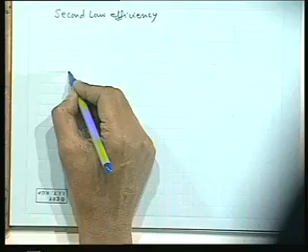Then we start with the second law efficiency. This first part is a repetition, but I must start second law efficiency again. We started with a turbine; hurriedly I will redo it. Let us first recognize a turbine. Now, what is a turbine?

Consider an adiabatic turbine. In all practical cases a turbine is insulated, meaning adiabatic. It is mounted on a shaft, so that we get work at a certain rate per unit mass. In a steady state, as I have told you, everything is done per unit mass.

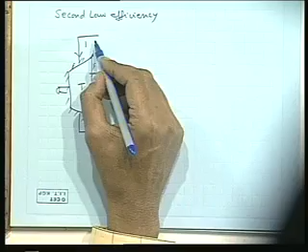So this is section 1, this is section 2, that is the outlet section, that is the inlet stream, that is the outlet stream. So the gas or air, whatever is the working fluid, comes at section 1 with an enthalpy H1 and goes out with an enthalpy H2.

If we neglect the changes in kinetic and potential energies, we know that del W del M, that is the first law or the energy balance for the steady flow open system, is H1 minus H2. That means we get work out of the difference in enthalpy. So, if at the same time we defined AF1 and AF2, what is AF2?

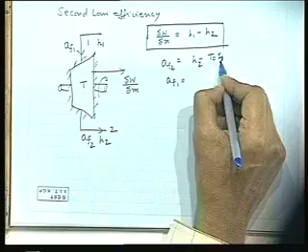By definition it is H minus T0 small s. This is the specific flow availability, so H2 minus T0 S2, and AF1 is H1 minus T0 S1. So, what is then AF2 minus AF1?

If I just write this from their definitions, I'll write AF1 minus AF2 instead, that will be better, does not matter. So, a minus sign will come, that will be equal to H1 minus H2, AF1 minus AF2 equals H1 minus H2 plus T0 S2 minus S1.

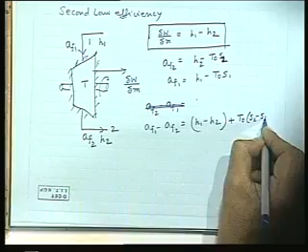So it is clear, you see that decrease in availability is equal to enthalpy change plus this quantity. But the change in enthalpy is what? Del W del M plus T0 S2 minus S1. So what is this? This is T0 delta S universe, because it is adiabatic. So the change in entropy of this working system is the entropy change of the universe.

Now, if the process could have been reversible, this part could have been 0, because the entropy change of the universe is 0 obviously. So in that case, we see it is the difference of availability which could have been the work done per unit mass. Therefore, we see the actual work done, which is the difference between H1 minus H2, is less than the ideal work done, which is equal to AF1 minus AF2, decrease in flow availability.

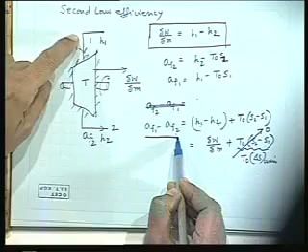So therefore, we could have got more work, which is equal to the difference in flow availability at the inlet and outlet, if the process could have been reversible. And this is gauged by an efficiency known as second law efficiency, which is defined as del W del M.

That is the actual work, divided by AF1 minus AF2, which is nothing but, sometimes we can write this as theoretical work, where this we can write as actual work, and this becomes equal to 1 when the process is reversible. This was clear, we discussed it in an earlier class.

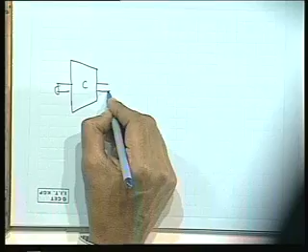Now, similar is the case if you consider a compressor. Now let us consider a compressor. The difference between the turbine and the compressor is that it is an adiabatic compressor. The difference between the turbine and compressor is that it is also a work interacting device, but not a work producing device, it takes work.

Let, on a per unit mass basis, del W del M be the work which is being added to the compressor, and let this be section 1 inlet and section 2 outlet. Similarly, let this be H1 and H2, and corresponding AF1 and AF2. Again, from the steady flow energy equation, you can write H2 minus H1.

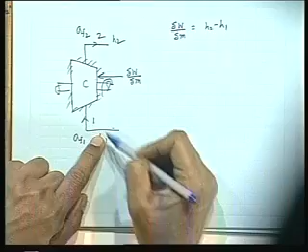Here I am always writing the positive value of del W del M. That means again work is added, so it will be negative. So if you write it, it will become H1 minus H2. I am writing in terms of the positive values. Obviously, when work is added, enthalpy will be more at the outlet than at the inlet, provided we neglect the changes in kinetic and potential energy. So always I write the positive value of the work, and we always recognize beforehand that this is the work taken by the compressor. So if I tell that, there is no harm if I write the positive value, that is true.

Now, here if you see, if you find out the increase in availability, rather AF2 minus AF1, what is AF2? The similar way, H2 minus T0 S2, and what is this? H1 minus T0 S1. So this becomes equal to H2 minus H1 minus T0 times S2 minus S1.

Just the reverse, in a sense. Here you see that H2 minus H1 is the work required by the compressor to go from state 1 to state 2, but the change in availability, the increase in availability, is less than the work required. That means the availability is restricted. If you compare this with your availability balance equation, this is all right.

That means the availability here is the availability here plus the availability taken in by the compressor, that is del W del M minus some amount which is T0 times delta S universe. That means in this case the system, the compressor, demands more work as compared to what it could have taken if the process was reversible. If the process was reversible, that term would have been zero.

That means this I can write: AF2 minus AF1 would have been the work requirement. So therefore we see the actual work requirement is more than the ideal work requirement. In this case, this will go on this side.

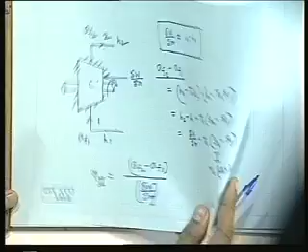Now, if the compressor is not adiabatic, then the Q quantity will come in definitely, and you have to consider whether Q is coming in or going out. I am just giving a simple case where the compressor is adiabatic. In case of a compressor, if you do not consider it adiabatic, then Q may come out.

In case of a turbine, Q may come out, or deliberately Q may be given, so it has to be specified. In that case the energy equations will be modified, and at the same time the availability equations will be modified. So availability balance will be modified; everything is written from that concept.

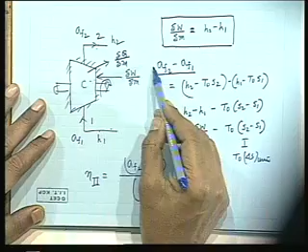So you will see automatically that when there is heat transfer also, the change in availability will correspond to your availability balance equation. But the definition is the same: the ideal work requirement divided by the actual work requirement. That is left as an exercise.

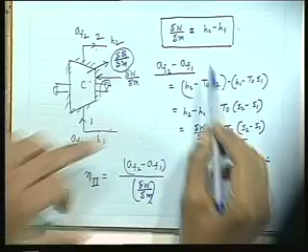You do it: if there is a heat interaction, let us consider some heat is coming out from the system, then what will it be? You change this thing. The definition of availability remains the same, but then H2 minus H1 alone will not account for del W del M; some heat quantity will come in that case.

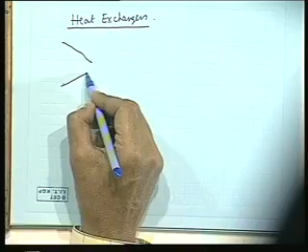Next is heat exchangers, non-work producing devices. Let us consider heat exchangers. There are two types of heat exchangers which we will read afterwards. One is the mixing type. Let us consider it simply, without calling it a heat exchanger, rather a mixing device.

Two fluids are mixed, 1 and 2, and the result goes out at 3. Let the flow rate of the first fluid stream be M1 dot, and the working fluid M2 dot, coming at temperature T1 and T2 with corresponding enthalpy H1. I am interested only in the enthalpy. This is stream 3, with M3 dot and enthalpy H3.

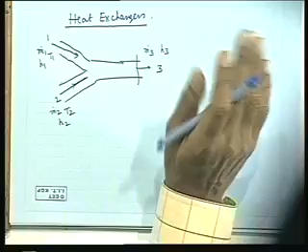Now, how do we define the second law efficiency of this process, or how to analyze it? First, mass balance. There are three things: one is the mass balance, another is the energy balance, another is the availability balance. Availability balance and entropy balance are almost parallel, as we have seen. So if these things can be determined, then one can determine everything.

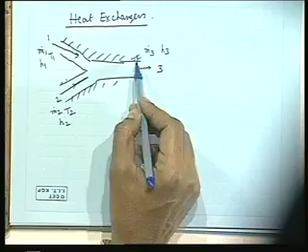Now let us consider the entire system as adiabatic. That means these two streams come in at different enthalpy, they mix and go out, so there is no heat and work transfer from this entire system. That means if we take this as a control volume, the control volume does not have any work and heat interactions. Then the mass balance tells us M3 dot equals M1 dot plus M2 dot.

This is okay. Then what is the energy balance? Energy balance is M1 dot H1, this is the energy coming in, plus...

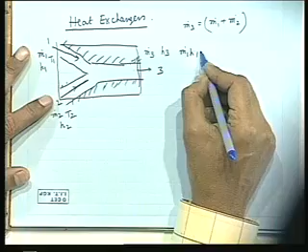Here I neglect the changes in potential and kinetic energy, so the kinetic energy part of the flowing streams I am neglecting. If it is specified that one side's kinetic energy is very high whereas the outlet kinetic energy is very low, or there is a large difference between the two streams, then we will have to take it into account. But if the kinetic energies are almost the same for all the fluids, we can neglect the kinetic energy part.

This energy balance can be written this way also: M1 dot into H1 minus H3. Let us consider M1 as the hot fluid and this as the relatively cold fluid, but it does not matter, is equal to M2 dot into H3 minus H2. I can write it this way also. That means the energy released by one will be the energy gained by the other. This is clear from this type of expression.

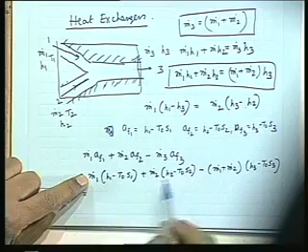So if you now write M1 H1 plus M2 H2, and M1 dot plus M2 dot times H3, they cancel each other. So I am left with minus T0, let us take T0 as constant, minus M1 dot S1, this is minus. So this is minus M2 dot S2, plus M1 dot plus M2 dot S3.

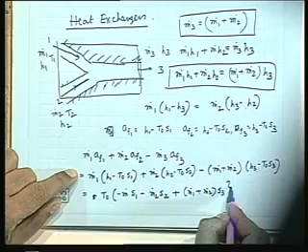What is this? This becomes T0 times M1 dot into S3 minus S1, plus M2 dot into S3 minus S2. What is this quantity? This quantity is delta S universe. So that means T0 into this is the irreversibility rate.

That means if I make an availability balance, availability in is equal to M3 AF3 plus I dot, or the other way: M3 AF3, the availability out, is the availability in terms of rate minus the destruction. Clear? So that is the availability balance.

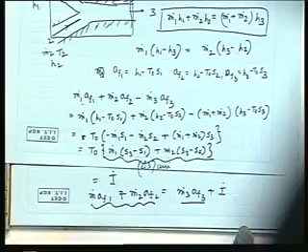In this case, now let's also look at the entropy balance side by side, so everything will be clear. The entropy balance: M1 S3 dot, this is the change. If anybody writes this entropy balance, he will write M1 dot into S3 minus S1, plus M2 dot into S3 minus S2, equals delta S universe.

One can also write it this way, where M1 dot S3 plus M2 dot S3 are the entropy going out. For better understanding, one can write this clearly: this is the entropy which came into the system with the flow, plus M2 dot S2, plus the entropy generated. While it is going out, you take more entropy, meaning entropy is being generated. While the exergy or availability is going out, something is being taken away from you. That is the concept.

Either way you can write it, this shows you a clear picture. Entropy going out equals entropy coming in, plus the increase due to entropy generation. Availability is the same thing: availability going out is availability coming in minus the irreversibility.

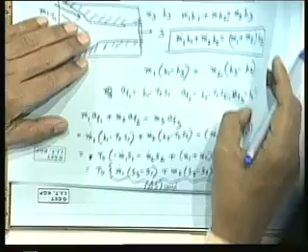In this case, how do you define the second law efficiency? Second law efficiency in this case is defined like this.

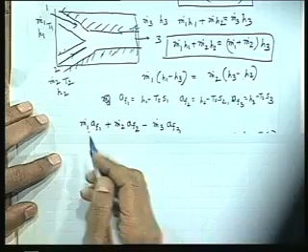We have taken the availability balance here. Can you see the availability balance? Okay, so let us write the availability balance again. What is availability balance? M1 dot plus M2 dot AF3 is M1 dot AF1, again I am writing, plus M2.

That is the availability in minus this. This is the availability balance.

Now, if I write the second law efficiency in this case, it can be written in terms of any of the fluid. Let this be the hot fluid. Sometimes it is written in terms of cold fluid. Let us write this is the cold fluid which has gained the availability, that means M2 dot AF3 minus AF2.

Corresponding loss of availability by the hot fluid is AF1 minus AF3. This is the definition, that means the availability increase in the cold fluid divided by the availability decrease in the hot fluid.

If you transfer it, you see the term irreversibility will come into picture. That means this gain is less than this by the amount of irreversibility.

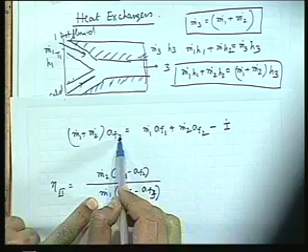If you transfer here, M2 dot AF3 minus M2 dot AF2, it will be M1 dot AF1 minus M1 dot AF3 minus I dot. That means it will be this thing, let this thing be x minus I.

That means the availability released by this fluid, if I consider this as the hot fluid, this is the convention. We define it in terms of the cold fluid, that is not being taken by the cold fluid. Cold fluid availability gain will be less than that released by the hot fluid. This way we define the second law efficiency for heat exchangers.

This is a mixing type. There may be non-mixing type, where the masses are not mixed, they go separately with a separating wall. That will be clear if we solve a problem.

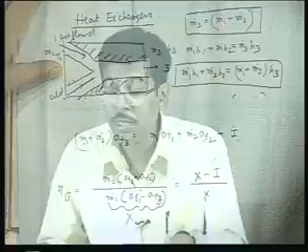Now, one interesting problem I like to place before you. After all these things, I think we are in a solid position. Our understanding, I hope, is very clear. So we are in a solid position to solve the problems. Let us consider a problem.

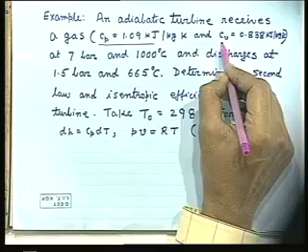An adiabatic turbine receives a gas whose properties are given: Cp, Cv, and for this type of gas always you take dh equals Cp dT, that is not given in this problem. You can take it if required, at 7 bar and 1000 degrees Celsius. These are the important things. And discharge is at 1.5 bar and 665 degrees Celsius.

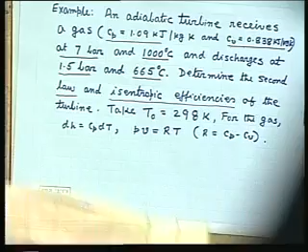Determine the second law and isentropic efficiencies. Very important - what is the difference between second law and isentropic efficiency? Just a minute. Second law and isentropic efficiency - what are the second law and isentropic efficiencies of the process in the turbine?

Take T0, that is the environment temperature, and it is already given for the problem, Cp dt, and PV you take RT, where R is Cp minus Cv. So what is this problem?

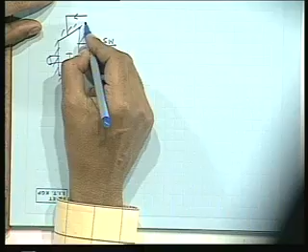Now let us draw the sketch. The problem is like this. There is a turbine, adiabatic turbine, which gives del W del M as the work. It is coming at section 1, the working fluid goes at section 2, that is 1 and 2. Then what is the value of del W del M?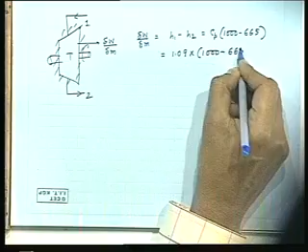Del W del M is H1 minus H2, per unit mass basis I am doing, and H is given, dH equals Cp dt. That means I can write Cp into T1 minus T2. What is T1? 1000 degree and 665 degree. I can write in terms of Celsius because it is the difference, and Cp value equals, what is the value of Cp given? 1.09 kilojoule per kg K. 1000 minus 665 - okay, so this comes out to be, let me see, this comes out to be 365.15 kilojoule per kg. So per unit mass basis I find out what is the actual work done.

Now what is the ideal work done, or AF2 minus AF1 - sorry, AF1 minus AF2, what is that? AF1 minus AF2 is 365.15 plus, which could have become if the process was reversible, plus T0. What is T0? T0 is 298 into delta S universe.

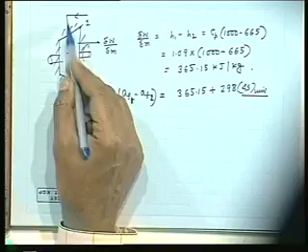Delta S universe. What is delta S universe? It is the delta S of the system. So, delta S of the system, if we have to find out, you have to use this equation: TdS is... why am I writing this not du plus PdV?

Because it is better to write in this fashion. You can write TdS is du plus PdV, it does not matter, I write both. So if you write this, then dS is dH by T minus V by T dP.

dH is Cp dT, that means delta S is Cp ln T2 by T1 minus V by T. PV is equal to RT, that means R by P, where R is Cp minus Cv.

One can find out by this expression. If we equate this, this will be... Sir, not R by P, sir. Just R. I am extremely sorry.

Very good, you are following nicely, so I am very happy. Cv ln T2 by T1, and what it will be? Plus R ln V2 by V1, and these two expressions are identical.

So any of these two equations I can use. So here if you calculate, T2 is given as 665 degrees Celsius, corresponding to that you can find out the absolute temperature. T1, P2, P1 ratios, so you can put in any unit, 7 and 1.5 bar accordingly, and you put it in.

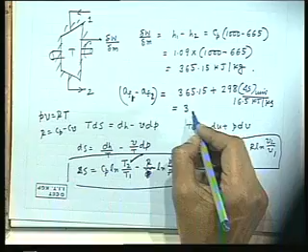And get the value, AF1 minus AF2 will be equal to what? 381 point... that means this comes out to be 16.5 kilojoule per kg. So this will be 385, just let me see, I have done it, 381.65.

So what is second law efficiency, please? Second law efficiency will be 365.15, 381.65, and that comes out to be 0.956. We have already done it, very good, 0.956.

But what is isentropic efficiency and what is meant by this? That is the only thing, because this evaluation of second law efficiency is a routine job, as we have already applied this thing in general for a turbine compressor. So it is a routine job by putting the numerical values.

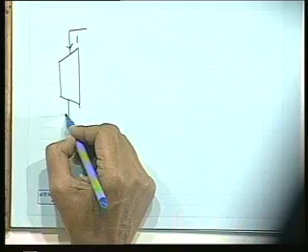Now what is isentropic efficiency? The concept is like this: this is a turbine, it comes at state 1, it goes at state 2. Isentropic efficiency will come afterwards in the cycle analysis, I will tell you, but for now, state 1 is fixed, state 2 is fixed, this is the turbine, and we get a work del W del M.

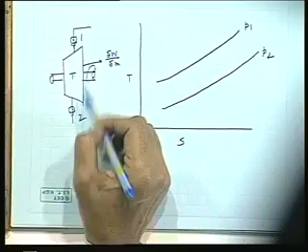Now isentropic efficiency is like this. If I plot a TS diagram, let us consider this as the constant pressure line P1, and let us consider this as a constant pressure line P2. If we consider this as a gas, either a superheated vapor or air or any gas, the constant pressure line looks like this. So rather, to understand this, I think it will be better if I use this as my state 1.

This is adiabatic, but this is not a reversible process. That means if it were adiabatic reversible, this will be isentropic, otherwise it is not isentropic. Now the question comes: isentropic means it will be vertical.

If it is not isentropic, that means a natural process, an irreversible adiabatic, then from the figure or the graph it can go either this side or this side, but it cannot go on this left side. This is because the entropy of the system would decrease, which will lead to a decrease in the entropy of the universe, since the process is adiabatic.

So the entropy change of the surroundings is 0. Therefore the only solution is that the entropy of the system will increase, because of the internal irreversibility. So the process is like this.

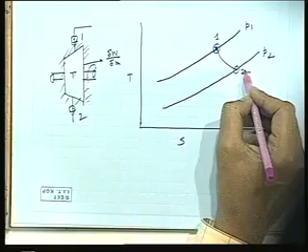So this is state 2. Now, what we considered here in the second law efficiency, is that between the same state points 1 and 2, if we could hypothetically consider that the irreversibility part is 0, then the efficiency which I arrive at is the second law efficiency. It is very difficult to understand, I am telling you, think about it yourself so that you can understand.

So the difference is very subtle between the second law efficiency and the isentropic efficiency. Second law efficiency is that we fix these two states, but there is an irreversibility between the two states. If irreversibility could not have been there, but the system state is 2, that means we are finding out AF1 and AF2 difference, which is the ideal work, provided the system comes from state 1 to state 2.

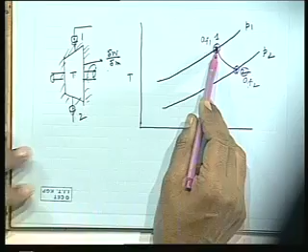It is a theoretical abstraction, because this availability is always designated to the state point, though it is a composite property. But if we consider the environment fixed, this composite property becomes a function of the state points of the system. So when the two states are fixed, AF1 and AF2 are fixed, and their difference is the ideal work. That means the work which could have been obtained if we discard the irreversibility.

For the process connecting the same state points, but now consider another picture: the system starts from the same initial state, but undergoes a reversible adiabatic process. If we consider a reversible adiabatic or isentropic process with the same initial state, then this process could have ended here, not there. That means this is the ideal process.

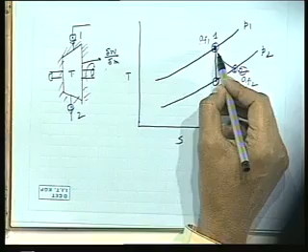That means if the process could have been ideal, we give a relaxation on the final state point. Very important, no book has defined this thing. I am telling you, you will not get such a lucid explanation in any book, the difference between second law efficiency and isentropic efficiency.

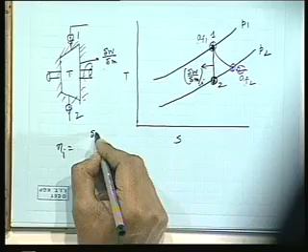Now how to find out the work done in this process? That means for the same initial state, but a reversible adiabatic process which ends up at a different state, we have to find out this S2 and corresponding H2. So how to find out this S2?

That means we will have to find out this T2. That means for S2, the change of entropy of the universe will be 0. So how to write the change of entropy? We can write delta S universe equals, let us consider DH, that means Cp.

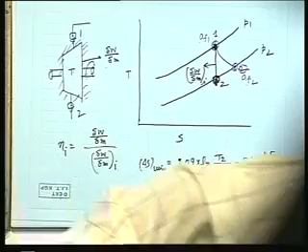What is Cp? 1.09 into ln T2 by T1. T2 I don't know, T1 I know. What is T1? 1000, that means 1273, minus R ln of the pressure ratio, since pressure ratio remains fixed, that means ln 1.5 by 7. This gives you a temperature T2, let me tell you, I have done it. This gives T2 which is equal to 891 point...

I am sorry, there is a problem. What was your temperature there? Cp ln T2 by T1... this T2 has to be more than this, so there may be a calculation mistake. What was the T2? In this case, isentropic expansion to 665. Oh sure, no that is correct. This is 891, I am sorry. 891.58 K, yes, that is less than this.

So that's correct, because this is 665 degrees Celsius, so this T2 is 665 plus 273 K. So you understand now, the concept is clear. So this T2 comes out to be this.

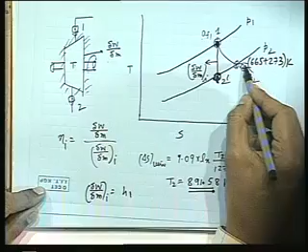Clear? That means del W del M I will then be H1 minus H2 dash, because this is state 2 dash, which becomes equal to Cp into T1 minus T2 dash, because the property relationship is dH equals Cp dT. We can find out this delta W, del W del M, and this becomes the isentropic work.

So that becomes equal to 415.75 kilojoule per kg, and accordingly eta is 365.15 divided by 415.75, which becomes equal to 0.878. So eta 2 is isentropic... sorry, eta I.

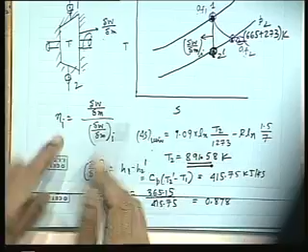Sometimes we characterize it with the same end state points by this formula, that is eta, the second law efficiency. Or we characterize the process by asking: for the same initial state and same pressure ratio, if there could have been an isentropic process, what would the end point be, and what would the ideal work be? That way we gauge the departure from reversibility and define that parameter as the ratio of actual work to ideal work.

That's the isentropic efficiency. Clear? Okay, next, another very simple problem. After this conceptual problem, we should do one very simple problem. Just see this problem.

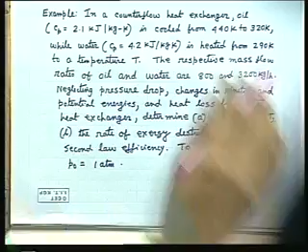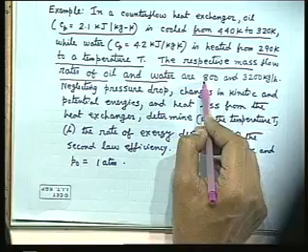In a counterflow heat exchanger, oil whose properties are given, with Cp 2.1 kilojoule per kg, is cooled from 440 K to 320 K. This is a heat exchanger problem. Water is heated from 290 K to an unknown temperature T, and in this heat exchanger the two fluids are separated and do not mix. The respective mass flow rates of oil and water are 800 and 3200 kg per hour. Neglecting pressure drop — these are the usual assumptions, if not given you assume this.

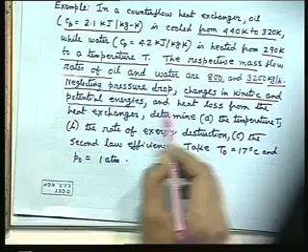There is a steady flow process, so we neglect pressure drop. For an incompressible fluid flowing steadily through a duct, pressure drop is only due to viscosity, so one can neglect that viscous pressure drop within a short length of duct — this is practical. So changes in kinetic and potential energies, and heat loss from the heat exchanger, are neglected, meaning there is no heat loss from the exchanger and the heat transfer is only between the two fluids, oil and water.

Determine the temperature T, the rate of exergy destruction, and the second law efficiency, taking the environment temperature as given. It is a straightforward application of the definition of second law efficiency in a heat exchanger.

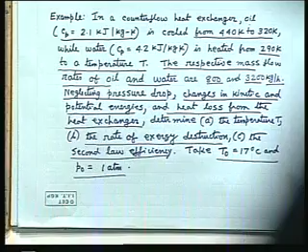So let us think of this problem. You have taken the problem. I am drawing this line diagram, block diagram, then it will be clear. Not necessarily always will you have to express it in language.

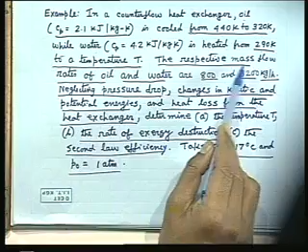Repeating: in a counterflow heat exchanger, oil with specific heat at constant pressure 2.1 kilojoule per kg is cooled from 440 K to 320 K, while water with specific heat at constant pressure 4.2 kilojoule per kg is heated from 290 K to an unknown temperature T, which you have to find. The respective mass flow rates of oil and water are 800 and 3250 kg per hour. Neglecting pressure drop, changes in kinetic and potential energies, and heat loss from the heat exchanger, determine the temperature T, the rate of exergy destruction in the process, and the second law efficiency, given the reference ambient temperature.

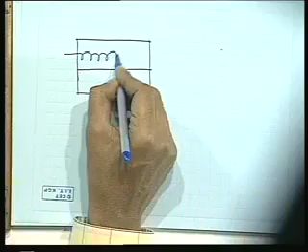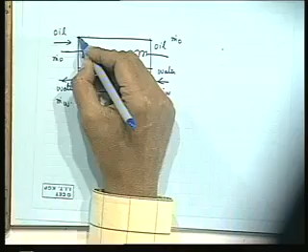So first we must draw the figure here. This is the heat exchanger, divided into two partitions. Let there be a coil for the oil. Let oil go in this direction — this is the inflow. Counterflow means they go in opposite directions; they are parallel, flowing parallel but opposite. Water goes out. Let m dot O be the mass flow rate of oil, and m dot W the mass flow rate of water. They remain the same by conservation of mass. The entire system is adiabatic — a very simple problem.

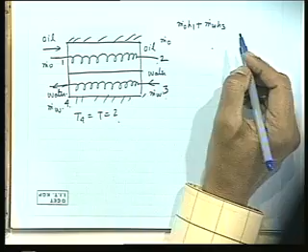Now let this section be 1, this section 2, this 3, this 4. So 1 pertains to the inlet of oil, 2 to the outlet of oil, 3 to the inlet of water, 4 to the outlet of water. So T1, T2, T3 are given, T4 has to be found — T4 is the T to be found. T1, T2, T3 are given; I am not writing them again. Now write the energy balance equation. What is the energy balance equation? Write: m dot O H1, coming in, plus m dot W H3, must equal, leaving out, m dot O H2 plus m dot W H4.

Okay, in this problem we again consider that dH is Cp dt, for water and oil both, since these are fluids. So we can write Cp into T1 minus T2, H1 minus H2 equals m dot, that is Cp oil and Cp water into H4 minus H3, that means T minus T3. Everything is given: T1, m dot oil, Cpo, Tw are given. We may not convert the unit to kg per second, we can use kg per hour since units will cancel out consistently.

So what is the value of T? It comes out to 305 K. This is school level calculation. Clear?

Enthalpy coming in, that means the energy coming in with oil and with water, these are energies going in. Since there is no heat or work interaction, and changes in kinetic and potential energies are negligible, we write dH equals Cp dt. So H1 minus H2 is Cpo into T1 minus T2, and H4 minus H3 is Cpw into T minus T3. Clear? Now how do we find the next part?

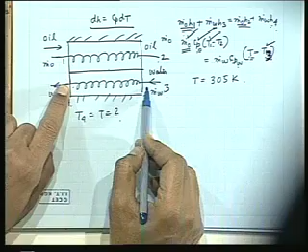If you are lucky, you are not asked to find the change in flow availability, because that calculation is more involved. But if asked to find the irreversibility or rate of exergy destruction, that is A dot destruction, which is nothing but I dot, which is T0 delta S universe dot. So we don't need to find availability at the terminal points or make an availability balance. We can simply say, from the availability balance concept, the rate of destruction of availability equals the rate of irreversibility, T0 into delta S universe dot.

What is delta S universe dot? It looks better written in terms of rate of entropy generation, which from state 1 to 2 for oil, plus delta S dot for water.

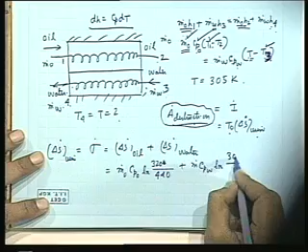So that is m dot O, Cpo, ln of T2 by T1. Now what is T2? It's 440, and after cooling it's 320 K. And for water, it's m dot Cpw ln T by T1, where T is 305 and T1 is 290.

So you find this out, and I dot is T0 sigma dot. The value comes out to 41.4. If you don't convert the time unit, the rate will remain in the same unit, megajoules per hour. Why unnecessarily convert it? There's no need, unless specifically asked to find I dot in joules per second. If not told, let's find it in terms of per hour.

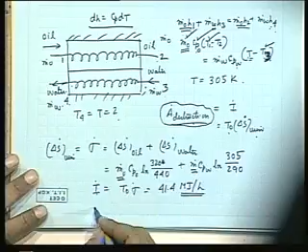Now, second law efficiency. How do we find it? The same way, we can write m dot water into AF4 minus AF3, divided by m dot oil into AF1 minus AF2.

Then you can find the second law efficiency, which comes out to a very poor 10.9%. So you see, this heat transfer through a very finite temperature difference incurs such an irreversibility loss of 10.9%. This is the definition of second law efficiency.

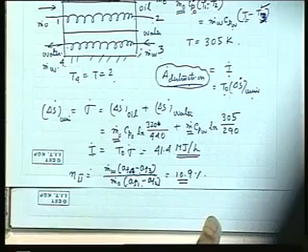You can express one quantity in terms of the other, since this equals that minus I dot. So you only need to calculate one, because once I dot is known, you can make the other calculation. Either way works. Clear? Please tell me, is this concept clear? I expect you can now solve any problem in availability.

Now I will start a new chapter. Today I could have let you go, but this is a studio class where I cannot release you before one hour. So let's start the next topic, the important property relations.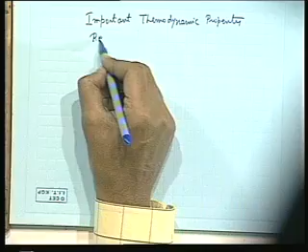Important thermodynamic property relations. Now let us find out what we have known up to this date. We know that TdS is equal to dU plus PdV.

This is the property relation we know, and at the same time this can be written in the form du is equal to TdS minus PdV. Can I not write this as dH equal to TdS?

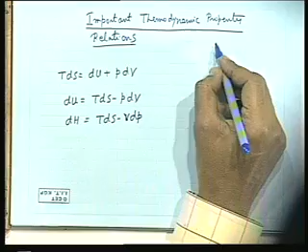This was discussed earlier also, plus VdP. Where does it come from? H equals U plus PV. So from there we can find out du plus PdV is equal to TdS plus VdP.

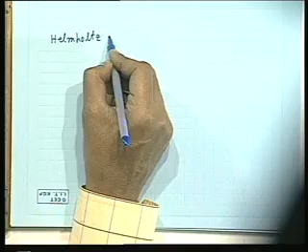Now I will introduce two new properties. One is, before going to that, one is the Helmholtz function. I told you that any jugglery between the properties will give another property, but just like that we cannot define millions of properties. This must have a physical significance.

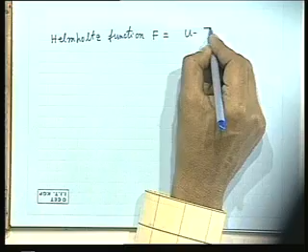The way U plus PV was defined, not like U minus PV or U by PV, which does not bear any physical sense, but U plus PV has an enormous physical significance, that is enthalpy. Similarly, Helmholtz function F is defined as U minus Ts, such a combination, and Gibbs function, these are named after the scientists who discovered them, Gibbs function G equals H minus Ts.

So I think some physical significance has to be told at the moment, otherwise you will not feel interested. For mathematical operations it is enough to know the definition mathematically, that F is U minus Ts, G is H minus Ts, the way we define enthalpy as U plus PV.

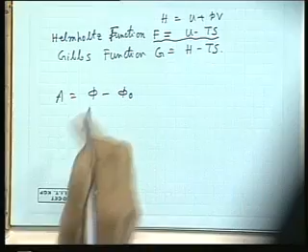Now, this Helmholtz function, if you recollect, our availability, that is the maximum work, is some phi at any state minus phi0. Where phi is u plus p0v minus t0s, and phi0 is corresponding to that, u0 plus p0v0 minus t0s0. So this is our availability function, which is a composite function or composite property of system and surrounding.

Why? Because this p0 is there, t0 is there. Now if I neglect this p0 part, that means if I consider that the work being done to compress the surrounding is neglected, or I consider a system whose pressure and temperature is same as that of the surrounding. But you can tell, sir, if it's a single component system, then both properties are same, that means they are in the same state, and that is a dead state.

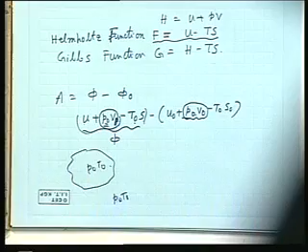So nothing will happen. Therefore I relax this: I consider the system temperature T0, if any process be the same as that of the environment, and the system performs a process isothermally, that means the temperature remaining the same, then this T0 can be written simply as the temperature of the system, because temperature remains constant and becomes equal to the temperature of the environment.

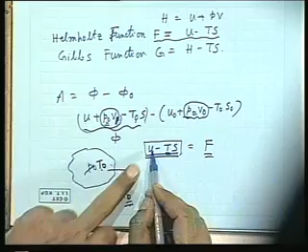So I can express a property of the system which is F, let me denote it by F, which is u minus Ts, whose physical significance is that the change in this function represents the maximum work, the reversible work, that we can obtain from a closed system under an isothermal condition.

Where the constant temperature of the system equals that of the surrounding. That means, again I am telling, it is the maximum work obtained, along with the non-useful work, the unuseful work. That means inclusive of the displacement work obtained by a system.

This is a concept: think of it as executing an isothermal process, meaning constant temperature, and that temperature equals the environment temperature. For example, when I equate PdV, sometimes I tell that at a constant pressure process this becomes equal to d of PV. Though pressure is constant, so this and this are the same thing. Similarly, if the temperature of the environment and the system remains the same throughout, we can replace T0 with T.

That means one can tell, sir, it is u minus Ts, that means if I know the system property, I can find it out. So the surrounding does not have to be spelled out.

If I tell that a system has this internal energy, this entropy and this temperature, and it comes to a state where this is the internal energy, the same temperature, and this entropy, and the surrounding has a temperature same as the system temperature under isothermal condition, then though the surrounding temperature is given, I only have to keep in mind that system temperature and surrounding temperature are the same. Then we can tell it is the difference between the Helmholtz function which gives the reversible work, or the maximum work, in that process.

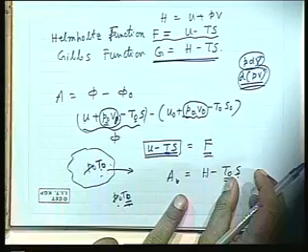Similar is the case with the Gibbs function, but it is with respect to a control volume or open system. We have seen in open system what is the availability: A is H minus T0S. Changes in this function represent a composite function, because T0 is there, not only of the system. A change of this is responsible for the maximum reversible work by a particular system at a different state flowing through a control volume.

Now, if I consider that this system is an isothermal system, the process is isothermal, and the working system maintains the isothermal condition where the initial and end temperature remain the same throughout, and that becomes equal to the environment reference temperature, then I can replace T0 as T and define a property which is a property of the system only, that is the Gibbs function. That means the Gibbs function is the maximum work available from a control volume for a given state of its working system at the inlet.

For example, if I have a control volume, a system at state 1 and state 2, with no isothermal condition, no constant pressure — that is the general case — then the maximum work we can get is the difference between the two functions at outlet and inlet, which are composite functions of system and environment, where only the temperature of the environment comes into picture. That function is H minus T0S. That means H1 minus T0S1, H2 minus T0S2, the difference of these two.

But if I add the restriction that the process is isothermal and that temperature equals the temperature of the surrounding, then the maximum work we could obtain is the difference between Gibbs function, which is purely a system property, not a composite environment property, because it does not matter whether it's environment or system temperature — they are the same.

This is very important in a constant pressure reaction process, where the reactor is continuously cooled to the ambient temperature or a fixed reference temperature and the reaction takes place isothermally. There no work is obtained, but we are interested in finding the destruction of availability or exergy in this chemical reaction. The difference in Gibbs function gives you that concept.

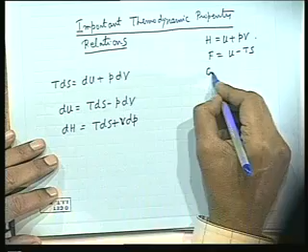We should only remember this formula: F equals U minus TS, that is the Helmholtz function, and G equals H minus TS. So we add two extra properties.

Now, what is dF, what is dG? dF equals dU minus TdS minus SdT. What is dU minus TdS? It is minus PdV. So this becomes minus PdV minus SdT.

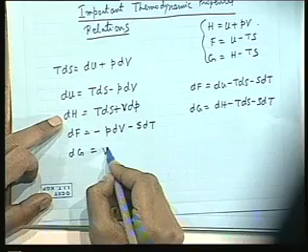What is dG? dG equals dH minus TdS minus SdT. What is dH minus TdS? It is VdP. So dG equals VdP minus SdT.

These four relations are the very basic property relations of thermodynamics, from which we will derive many important and interesting relations afterwards in the next class, because time is up. So we will start from this point: four properties — internal energy, enthalpy, Helmholtz function and Gibbs function — expressed in terms of their differentials in terms of other two properties. Okay, so up to this today.